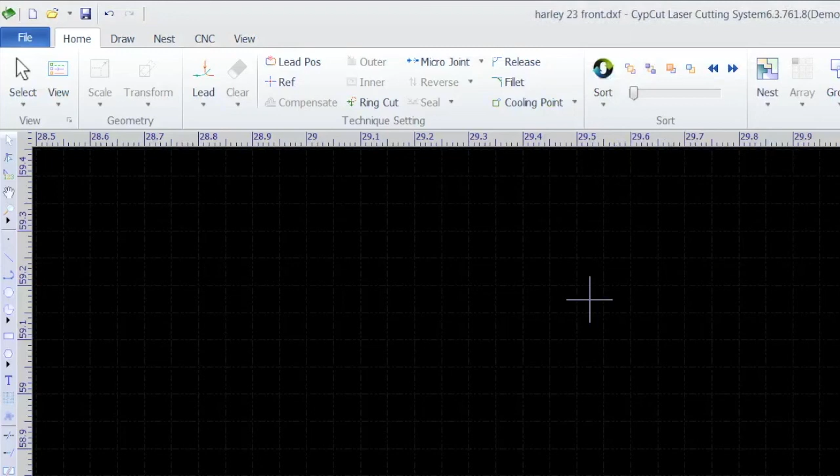All right, so here we are on part 3 of the video series, and we're going to walk through the process of importing a drawing and setting up the cut path and saving a drawing and that kind of thing. So you want to click on the file menu here and go to import and then pick the file type that you're wanting to import. In this case, we're going to do DXF.

So I'm going to pick the very top one, and if you notice, there's a little preview check mark here where you can get a little preview of what you're importing, and it's also giving you the dimensions of what it is that you're importing, so you can see what it's scaled at right here in the preview. So I'm going to click OK to that, and you see it brings in our drawing.

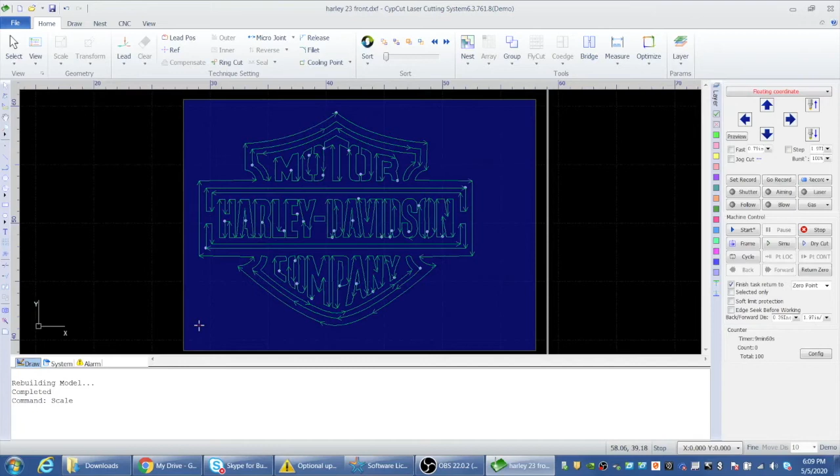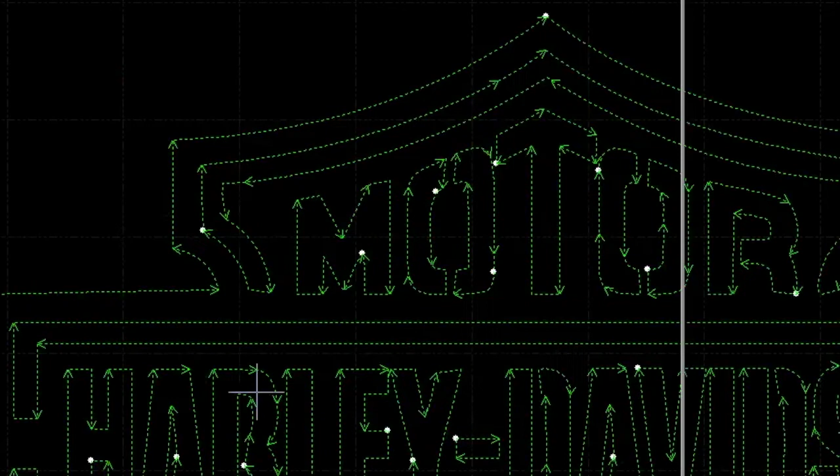Okay, so from here, maybe one of the first things that you want to do is scale or change the size of the drawing. So again, you're going to drag across all of it so it's turned into dashed lines, and then you want to click on scale right here, and you can scale the whole drawing here. This is 23.5 inches wide. If we wanted it 48 inches wide, we could just change it right there and rescale it. So that's how you rescale.

One of the first things is, sometimes depending on the drawing, CypCut will not recognize what the outside contour of that is, and you have some options that you can do here. But one of the ways that you can tell is, let's go ahead and put a lead on it. So right up here, we're going to click on the lead to bring up the lead dialog box.

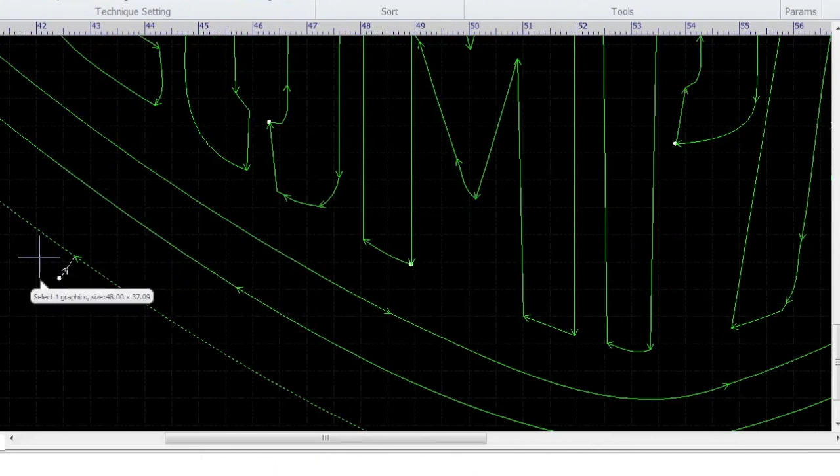And it's coming up saying it's going to give us a 0.25 straight line, 90-degree lead. So we could just say okay to that, or we could change it, make it 0.5, whatever you want to make your leads here. And I'm going to click OK on that. And you can see that it moved it down here.

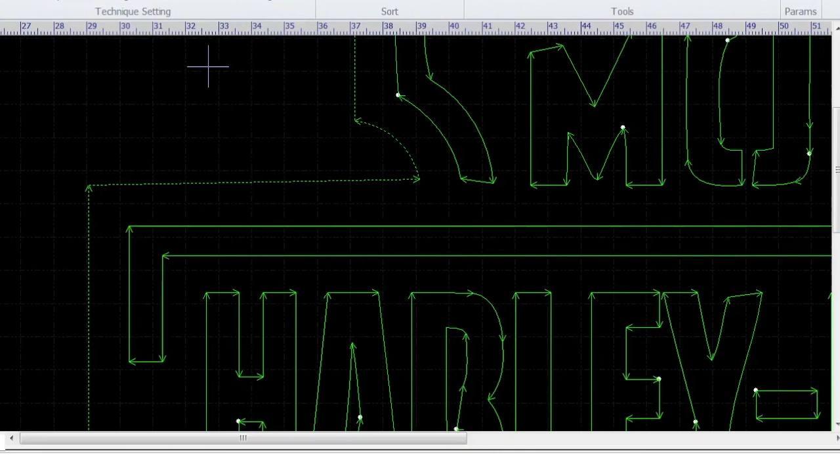And what you want to try to do on an outside contour with a lead, if you want it not to have a witness mark as to where that lead is, is to put this on a 90-degree corner. And if you've had experience with CNC plasma or other CNC, you know that this is a common method to be able to hide your outside lead. So if you want to move your lead from where it is to where you want it to be, you go up here and click on this lead position.

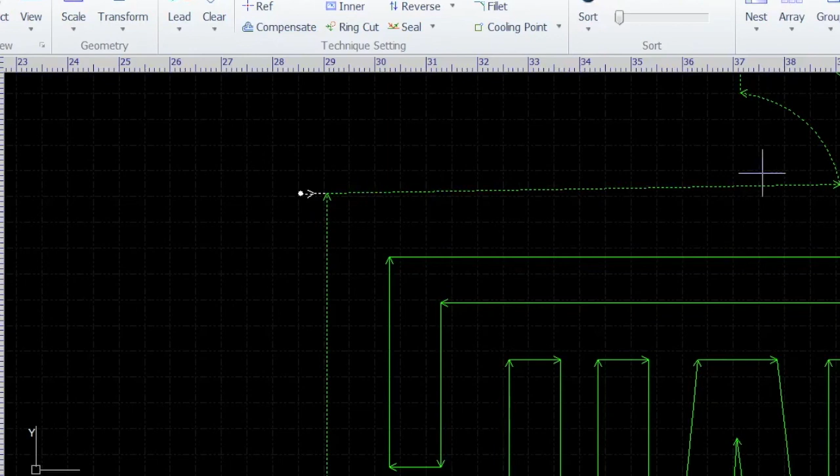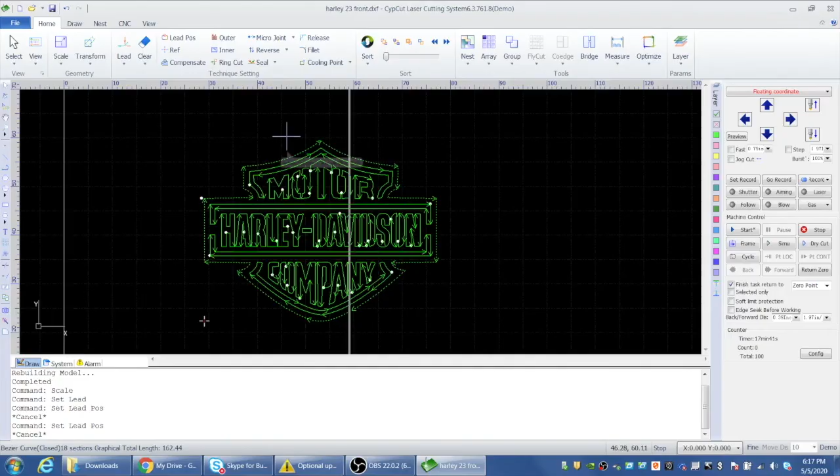And if you come in and click, you'll notice that wherever it thinks it may want to put it, it'll turn it into a box with the crosshairs there. So now it's going to lead in, and it's going to cut in the direction of the arrows. You can see the white arrow there and the green arrow here, and go all the way back and cut and finish up right here, on an area where you wouldn't be able to tell. So everywhere that you see a white dot, that is representing where it thinks it wants to put the lead now. All right, so you see that we've set the outside lead in there.

I know I kind of jumped the gun on this, but the main thing I wanted to show you was that sometimes on the outside contour, it won't recognize that it's outside if it's got some kind of an issue with the drawing or whatever. But if it's set up not to recognize the outside, and look, here, since I did this real time accidentally, this software, I don't know why it is, but it's really sensitive and easy to kind of pick up a part of the drawing.

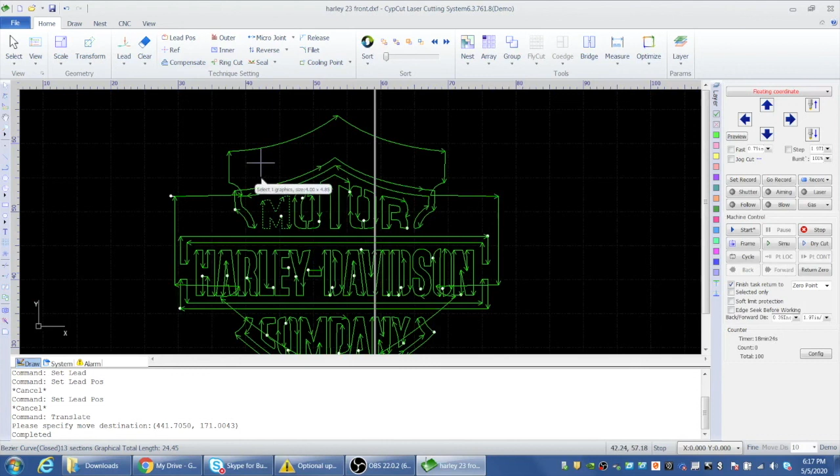And I have made mistakes where I've accidentally picked up a bolt hole or something and moved it a slight amount without even really meaning to. And if you don't move it very far, you might not even realize you did it until you cut it. And so just be really careful of that. I'm going to just undo that to get that to go back.

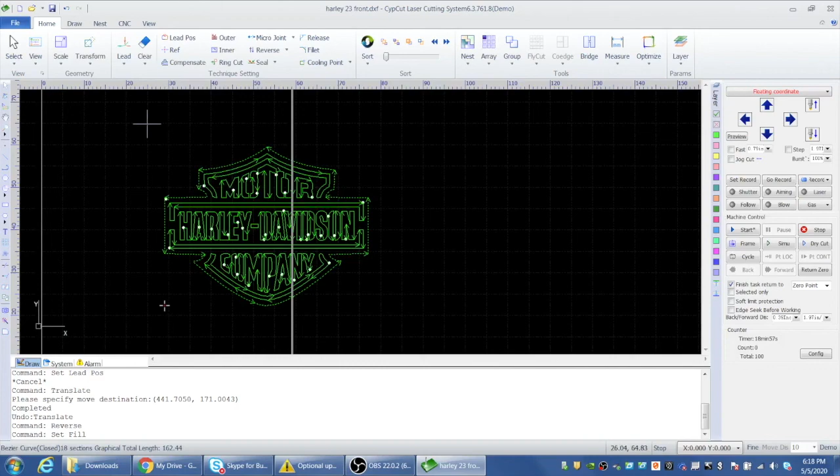So what I wanted to show you was if you create the lead and you notice that it's actually trying to lead on an inside lead on what should be the outside, the way you can correct it very quickly and easily is just highlight that contour like that, and you see the lead in there. And then if you go up here, you get these two toggles, so you just click on outer and it automatically moves it to outer.

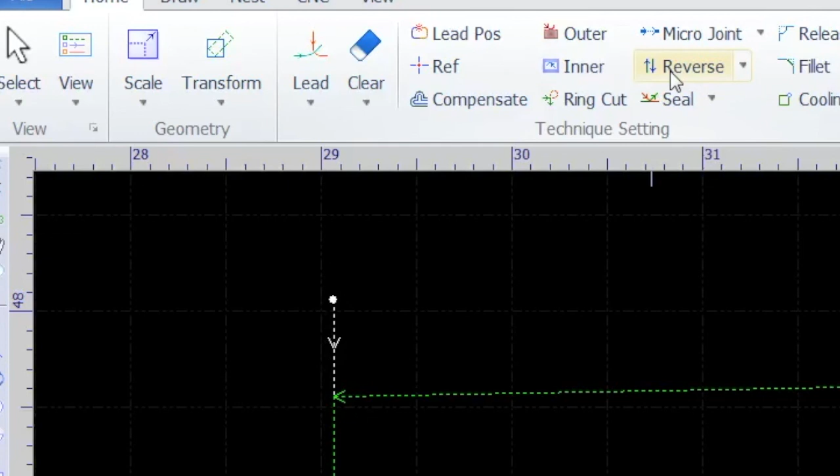And if it's going in the wrong direction, which it should be going clockwise on an outside cut, you can just click the reverse here, and that will toggle the reverse. So you can toggle inner and outer and toggle the direction of cut with those two things. But in general, it should recognize it and know what direction everything should be cut in. But the rest of your drawing, everywhere you see a white dot represents the pierce point or the lead point, start point of the drawing.

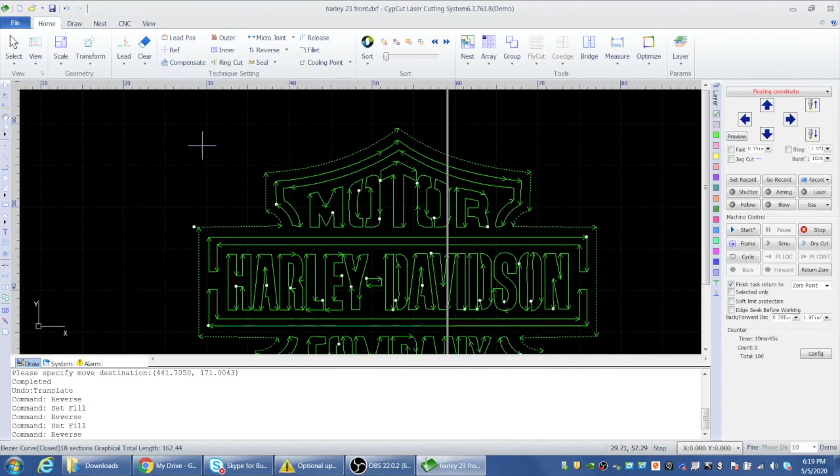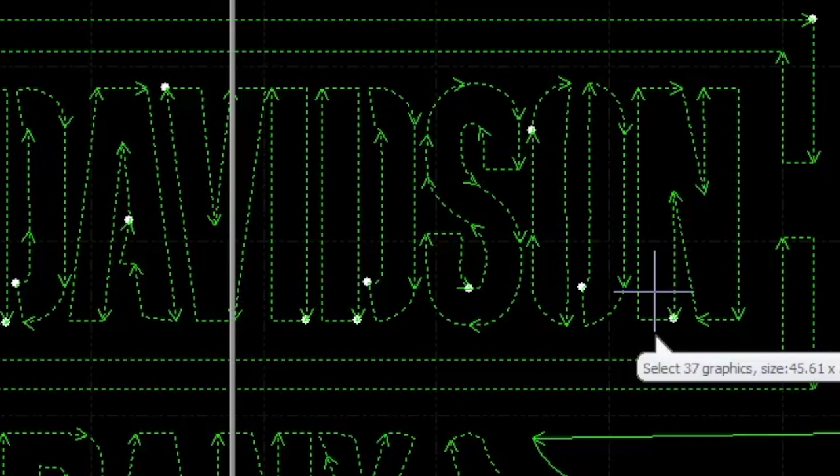And so let's go ahead and set the leads for the inside part. And you could do this one of two ways. You could highlight all of it and then hold down the shift key and select the outside contour. And if you see that, it's in solid green and the inside's all broken up, which is an indication that what's highlighted are only the inside cuts. You could do that and then set your lead for that, or you could just highlight all of it and then go up here to lead.

And let's just say we want to give this an arced lead in on an inside cut, and we're going to make this 45 degrees on the arc lead in. We're going to make this a little bit shorter. We'll just go to 0.2 on that. So because we have the whole drawing selected, we could click the check mark right there so that it will only apply that to inside contours.

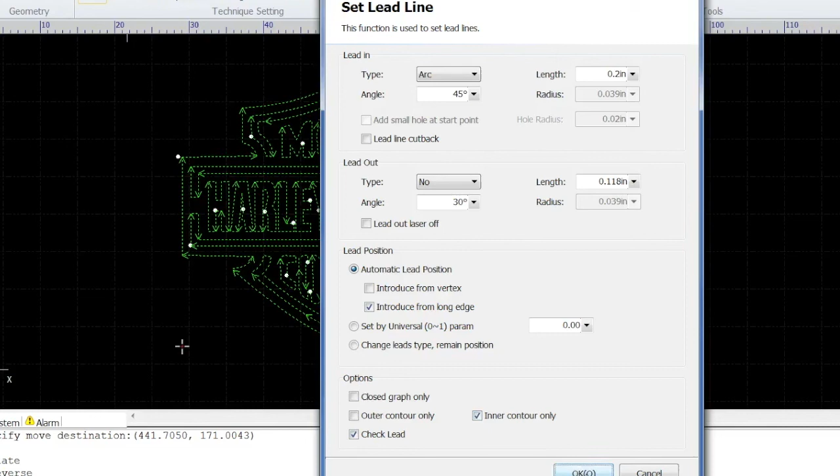And if we zoom in, you will see all of our inside contours now have a 0.2 arced lead in. And now that you've got this fully set up, you could go ahead and click your lead position and just kind of scour down and make sure they're in a good spot.

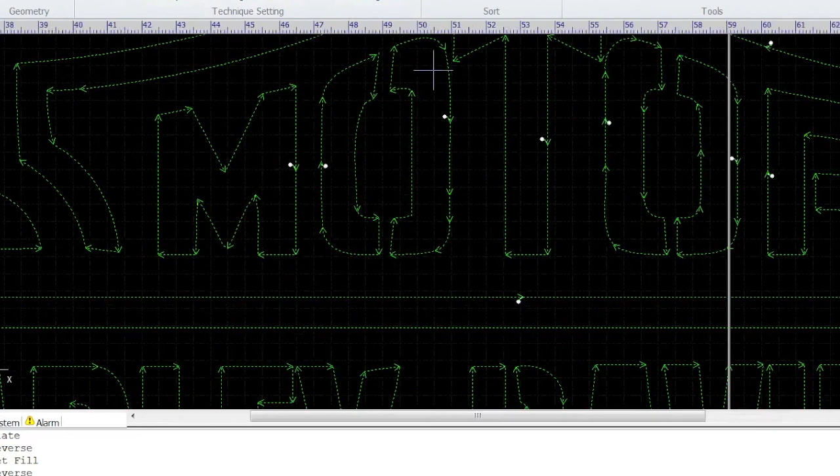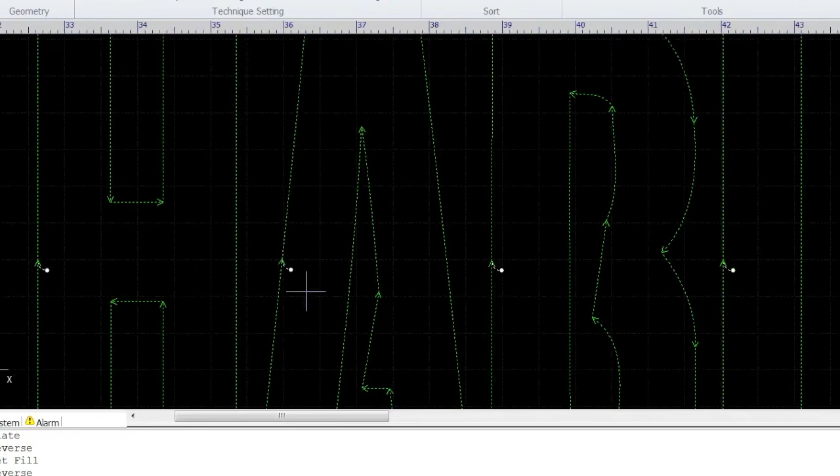And some best practices are, make sure you don't have it in an area that is too close to the next lead in, or too close to or in a corner or something. And I'm just trying to find one that may be a good example. All these look like they're in a pretty good area by default and would cut pretty well. But sometimes they can be in a little bit of a funky place.

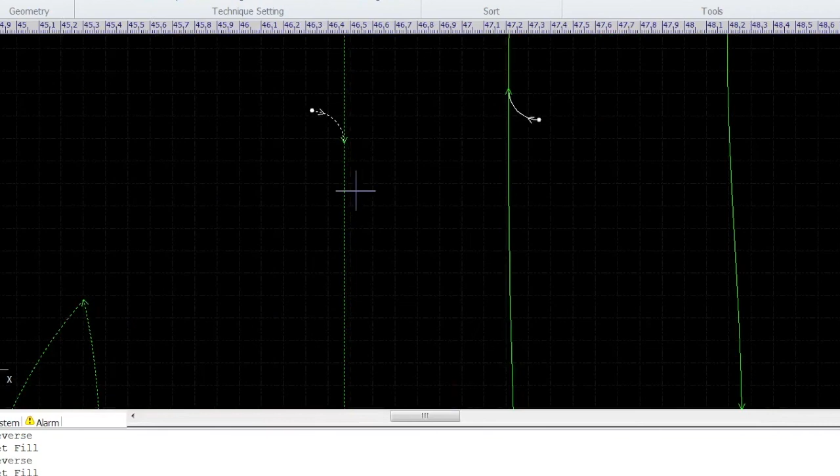All right. So after that, another thing that you can set, and we can get into this in a more detailed fashion later, but let's just say we wanted to micro joint the letters so that they don't tip up. If we wanted to have a micro joint on it, you would click whatever you wanted to be micro jointed, and then click this micro joint area, and then auto micro joint. And you could tell it how many you want around the entire contour.

But if you just specify one, then it will default to putting the micro joint at the lead in, which I have personally had pretty good luck with. But you can experiment with it and place it in different ways depending on what it is that you're cutting. So right here you see that it's given us a micro joint lead of 0.079. And if you're cutting thin sheet metal, that's going to be a little bit too big.

If you're cutting thicker material, then a good starting point is whatever the thickness of the material is, go with that. So if we were cutting this out of 16 gauge sheet metal, you could make this 0.06, and go even down a little bit further than that. It depends on how strong of a hold you want on it. 16 gauge sheet metal is 1.6 millimeter. If you have a lead in of 0.03, it may or may not hold it. It may be enough nitrogen pressure to actually break the lead in that it leaves.

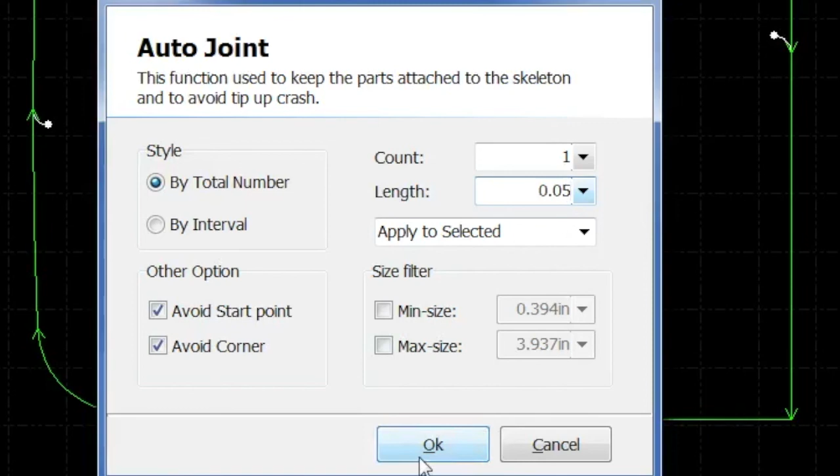So, somewhere between 0.03 and 0.06, 0.05 might be pretty good, but we're gonna select that and look at our lead in. Now, why did that not take? Let's try that again. So we're gonna go micro joint, auto micro joint, apply to selected, 0.05. Oh, right here. So you see that we had Avoid Start point selected.

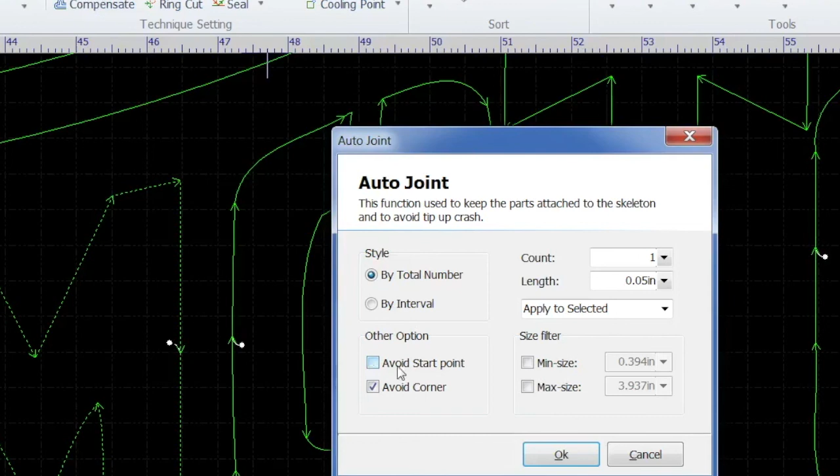So if we click this again and we zoom in, you'll see the micro joint is at the start point. So this thing's going to lead in, make its cut all the way around the letter, and then when it gets back to the start point, it's going to stop a little bit soon, and it's going to leave a tiny little gap right there.

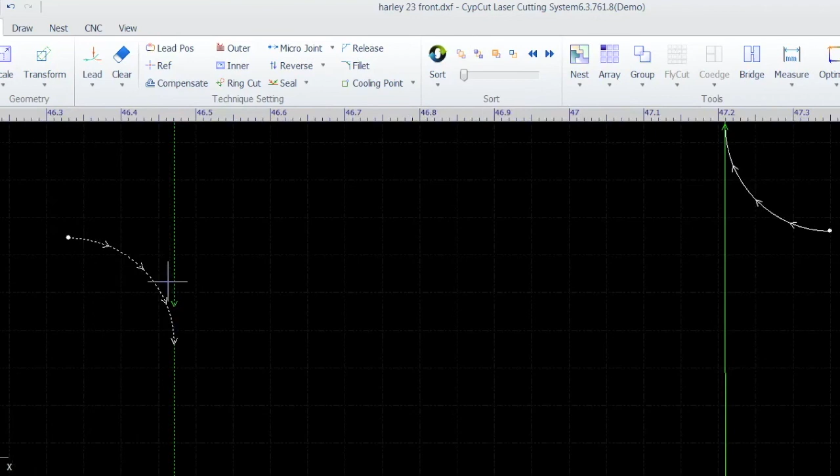And the lead in type can also affect how big your micro joint needs to be. So if you see this arc is kind of encroaching in on the space that it leaves, if you change that to a straight lead in, you would actually want to run a smaller micro joint. So that's a real basic orientation on micro joints.

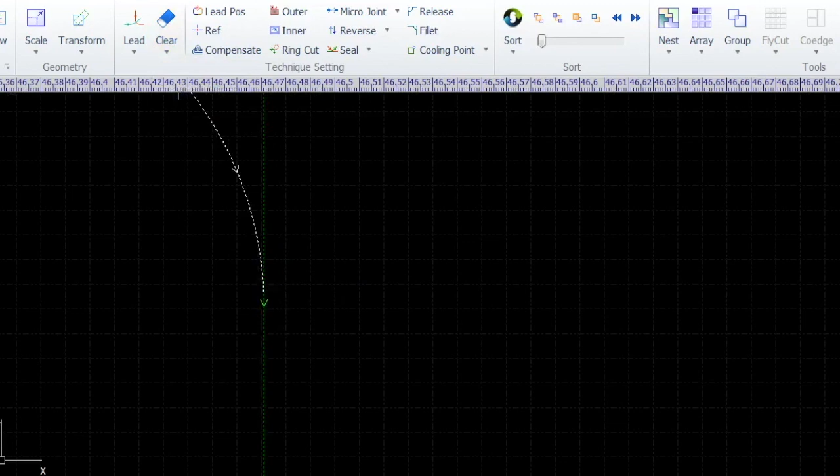If you want to clear the leads and the micro joints, if I just click this one to highlight it, and we'll zoom in where we can see the micro joint. The way you clear it is to come up here to clear and then say clear micro joint, and you see it got rid of it. You could also clear the lead. So clear the lead right there, and now it's not running any lead, and it's moved the lead point back.

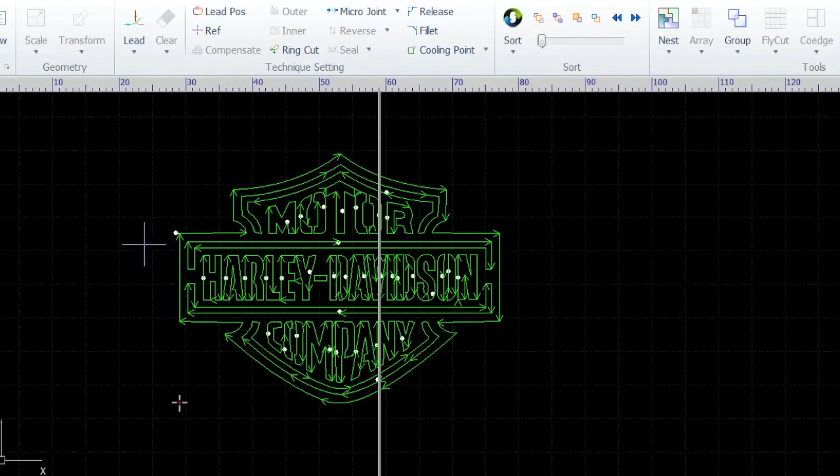Okay. So that is a very basic orientation on setting your cut path and your leads and lead outs and micro joint concept there. So if you want to save this so that you don't have to rework all that again in the future, you do save as, and you save it as an LXD format, which is a LaserDoc 2.0 format.

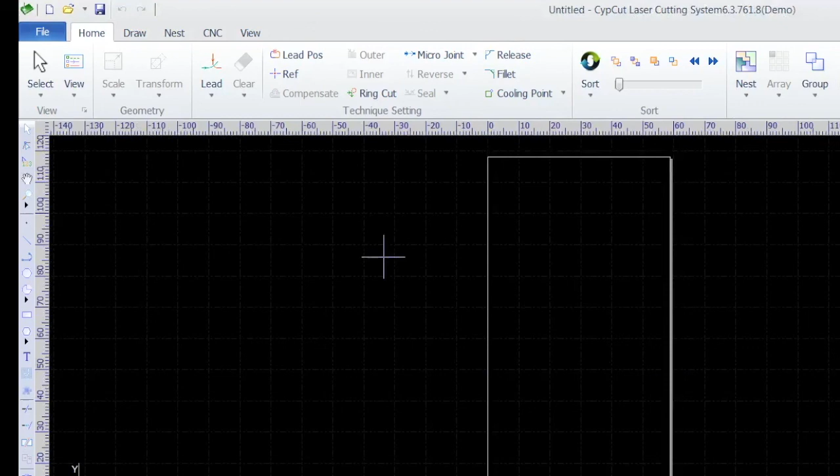So we're going to save that, and we're going to just delete this out of here, and we'll just go ahead and create a new one, for example. So now we have a blank canvas. So say it's a week later and you want to cut another one of those. So now you can go File, Open, and reopen your Harley.dxf, and you can see our lead point that we've already set, and the other leads are just like it was when we last left it. So you don't have to redo your CAM cut path operations in the future.

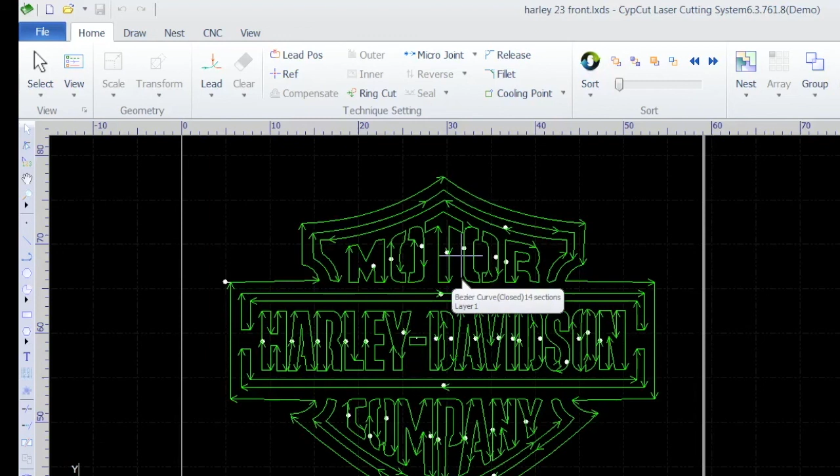So that's a really basic setup of the job. And after that, you want to go and set your parameters of what kind of material it is. So we're gonna switch to the next video on setting the cut parameters, which is gonna be a lengthy video in and of itself.